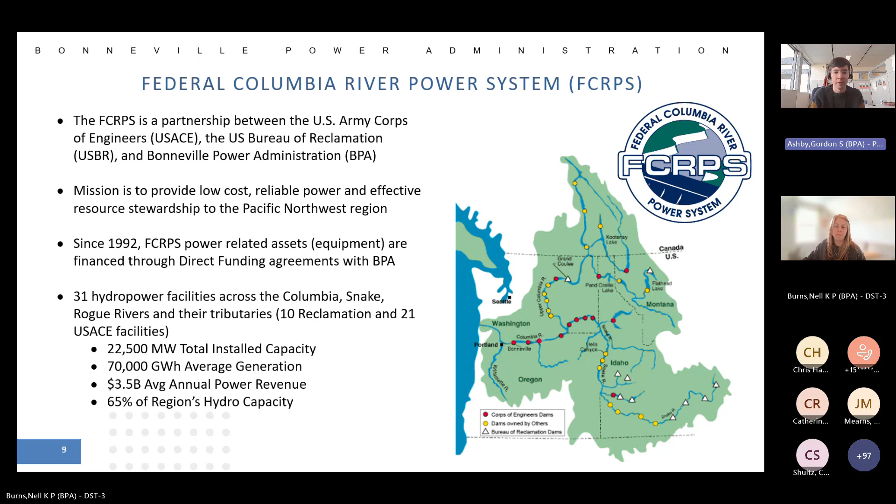Let's talk about some of the projects we funded through TI. This is one we've been working on for quite a while. We've done a couple of projects through TI on the Shuffled Complex Evolutionary Turbine Optimization Model, or SCE-TOM. Basically, this is something we've partnered with the Army Corps of Engineers to develop through the Hydroelectric Design Center, specifically the Hydropower Analysis Center, HAC.

What that model is doing is basically saying, given a head and flow and a number of units available and specific turbine designs, how much can you generate in a given hour? Essentially, it's an hourly model. It deploys the units in the most efficient way it can, and there's a lot of benefits to that.

It's become a very critical part of our capital investment analyses. We use it to evaluate different turbine designs, to see if Kaplan versus fixed blades make more sense economically and technically. We also use it to understand the impacts of unit outages. I'll talk about that a little bit more.

This specific project we're working on right now is to actually improve the computational power, I guess. Because what it's doing is looking at a bunch of different combinations of how you could deploy units under certain conditions. It can take a long time if there's multiple unit families and a lot of units at a plant.

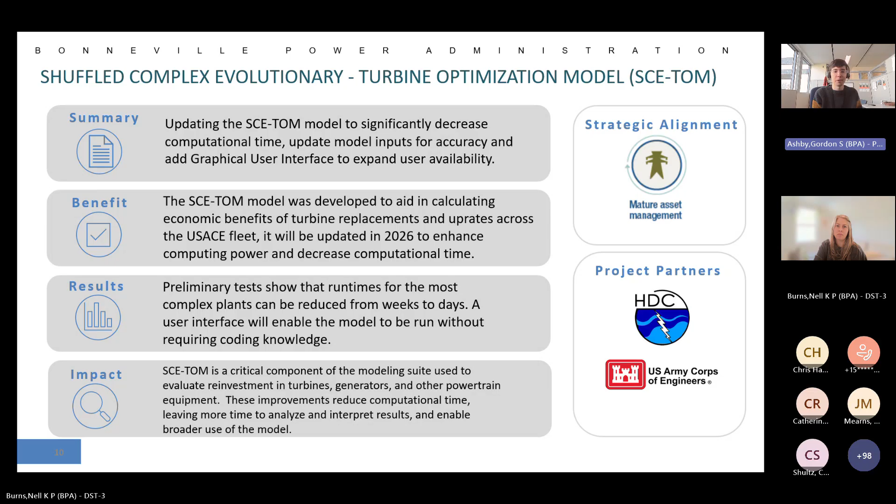Let's go to the next slide, and I'll talk through a bit more about how this works, in case you're interested. Basically, it's all based on these power hills. As I mentioned, it's looking at combinations of flow and head. You can see flow on the y-axis and head on the x-axis.

Each one of those bands is an amount of generation. At the very top line, it's a little hard to see, but that's 400 megawatts, for example. You can hit that across a number of different points in the head range, but the amount of flow obviously differs based on the head.

So this is basically creating a giant lookup table that says, given a flow and head combination, what is the most efficient way to deploy the units? In the background, given which units are available, it's able to track which way it would be deployed. Let's go to the next slide to see how we use that.

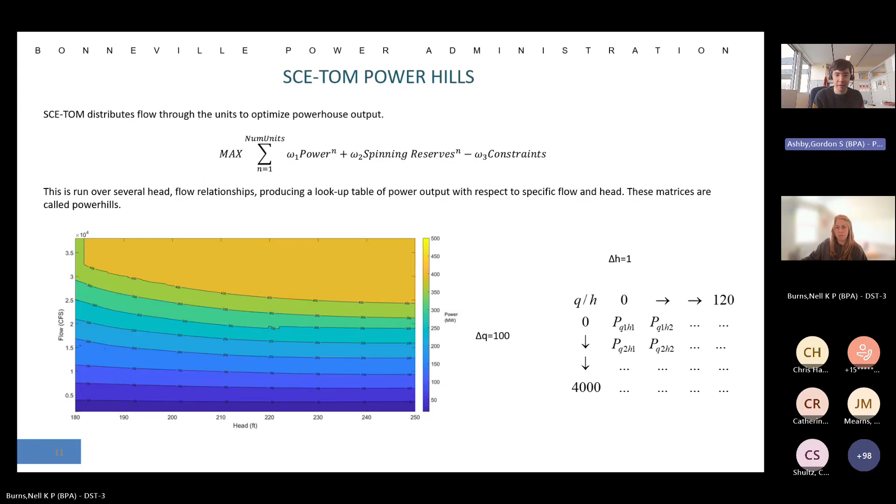We can look at the impacts of having units out of service, for example. On the top chart, if you have all units available, at the very top right the maximum you could possibly achieve would be 2,900 megawatts. But if you look at what it would look like with 3 units out, that 2,900 megawatts just isn't even on that hill chart anymore.

So maybe looking at the next line, where I've marked 2,500 megawatts, you can see that you can meet that with all units available, all the way to about the middle of the head range there, between 90 and 110.

But with 3 units out, you won't be able to meet that as frequently, and you have to have relatively high head and high flow in order to meet that. It kind of goes vertical, pretty close to the right side of that chart. So what's useful with this is we can get a really good picture under different circumstances of how much a plant can generate, and that enables us to get a really good look at the risk of losing units due to forced outage. So this is something we are really motivated to improve our ability to capture.

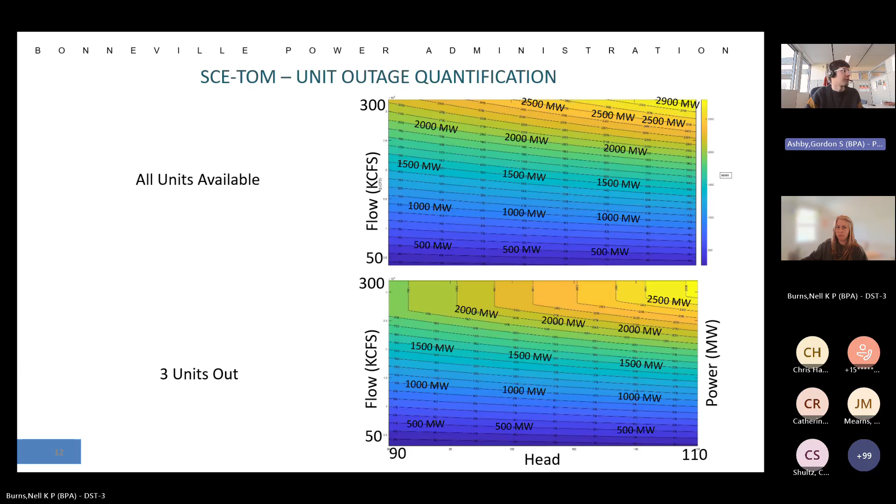Let's go to the next slide, and we can show how the SCE-TOM kind of fits into our broader economic analysis process. On the BPA side, we run a reliability model that looks at and simulates unit availability.

We do it on an hourly time step for something like 50 years to look at the full life of a unit. That model is availability workbench, a commercial product. We just use that to look at the planned outages due to general maintenance or capital investments, and then it simulates outages with failure curves that are loaded into it, Weibull curves.

So from that, what we get is 1,000 iterations of unit availabilities by hour, essentially, and that is what SCE-TOM and another related model use to tell us here's what you can generate under different investment strategies. We run different investment strategies through the reliability model that tells us which units are going to be available. Then, given that unit availability paired with the head and flow information and other hydrology, SCE-TOM can tell us here's how those units would be deployed.

And then the additional model, called the energy linking model, tells us here's the actual amount of energy you'd be able to generate under these scenarios. It also lets us understand reserve potential as well as different unit starts and stops. So we're able to really evaluate under different combinations of turbine design, if we want to look at a combination of fixed and adjustable units, for example, what those impacts might be.

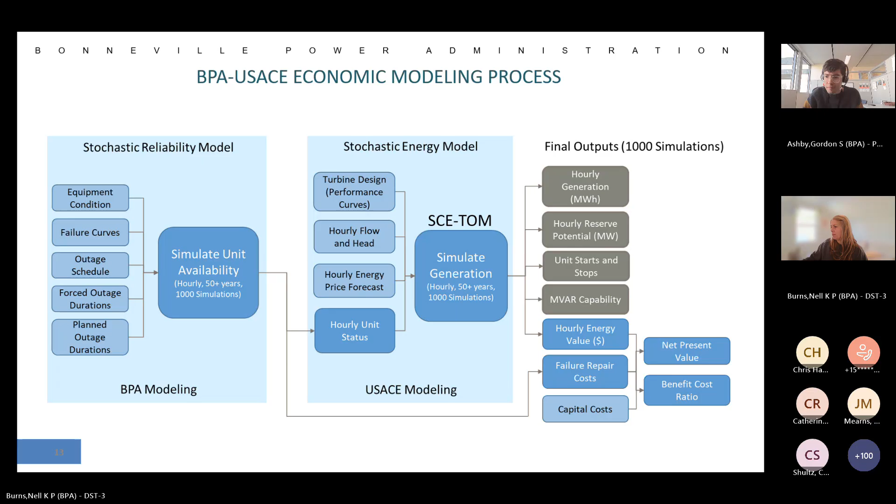Let's go to the next slide. Lastly, what this all kind of comes down to is we can take the availability forecasts from different investment alternatives, as you can see on the left side there, and then turn it into a stochastic analysis.

So we can present to executives, customers, et cetera, the range of uncertainty that is inherent to investment in hydropower, just because of the variance in energy price forecasts, water, and all this kind of stuff. It's helpful to be able to show that range of uncertainty because just using point estimates, sometimes it's hard to understand if you're right on the line between a positive or negative investment, or if you have a wide range of uncertainty, or are fairly certain in the benefits.

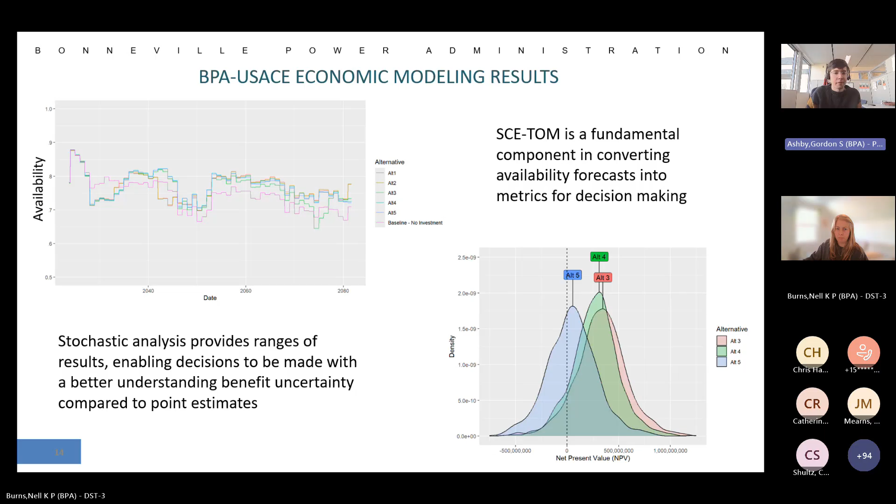All right, let's go to the next project. So the next one we've been working with the Army Corps on is a reliability-centered maintenance pilot. This has been kind of a partnership with the Army Corps and Aladon, who has been facilitating a lot of the pilot activities. The main purpose is just to start to understand how the Corps can implement more RCM procedures in their maintenance program. What they want to do is identify, for specific asset types, what's the right level of maintenance to meet the reliability needs at that plant for that asset type.

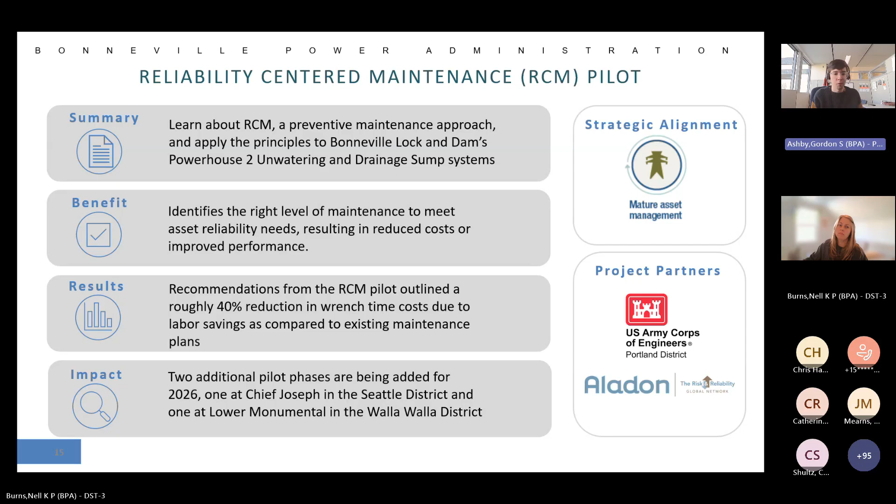So there have been some interesting recommendations that have come out of that. There've been a couple pilots that have been completed, and there's a couple more planned in the future. Let's go to the next slide, and I'll show a little more information about the types of things that have been learned.

So just generally, what is RCM? Here's kind of the 8 questions of RCM3, but the main thing is you want to look at the specific assets you have, look at their requirements, and then determine what are the right things to do to maintain this particular asset in order to meet its requirements and its mission. So what must be done to reduce intolerable risk to a tolerable level, and what can be done to reduce the tolerable risk in a cost-effective way. These are the kinds of questions that the teams are going through.

They're evaluating the failure modes and effects, evaluating the consequences of those effects, and then looking at their job plans and deciding whether there are things that are redundant in these job plans that are primarily time-based maintenance in the past, or are there things that are lacking. We've actually seen a few different examples. So let's go to the next slide.

So the first thing that was looked at was the unwatering and drainage sump system. That was one where they had identified there were some redundant maintenance tasks performed by multiple crews, so they were actually able to reduce wrench time on that equipment at that plant. They were able to see that effectively things were being over-maintained for what they actually needed. So that's an example where you've reduced some time, maybe saved some cost, or just freed up time to work on something more critical.

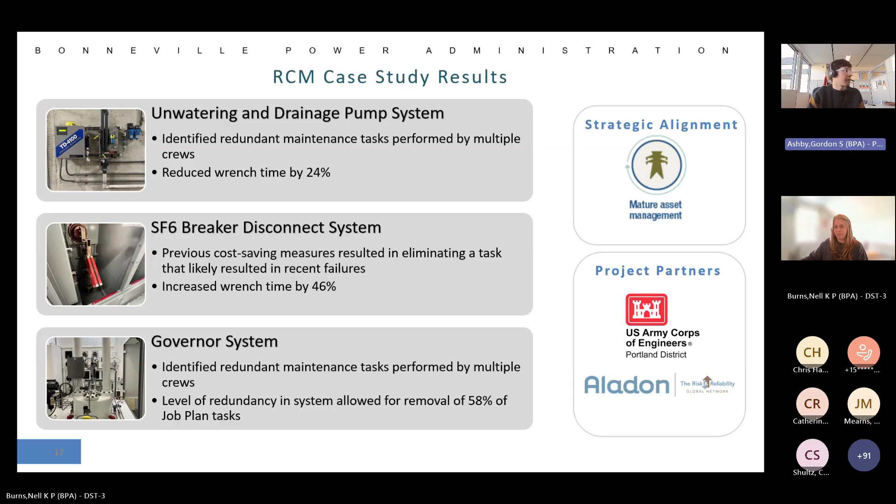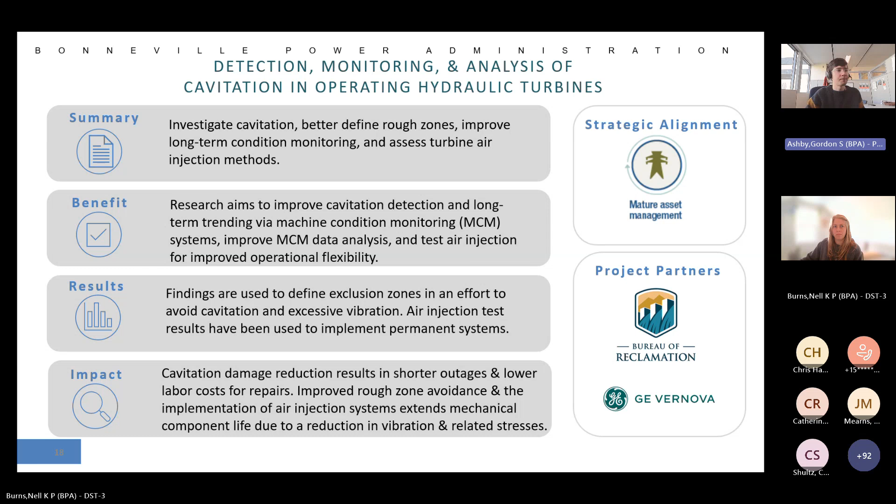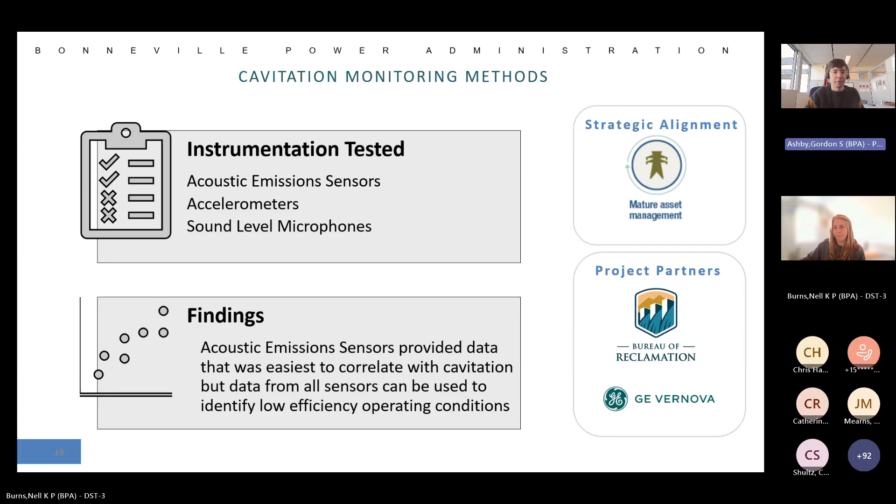So that was all of those that we were going to chat about today. We can definitely start to take questions if you have any for either of us.

Super, well thank you so much, Nell and Gordon. That was a great overview. I'm sure it's going to generate a lot of great discussion and Q&A here. So just taking it from the top, Jeff Leahy dropped in two questions. Nell or Gordon, I think you addressed the second one. We'll revisit it, but back up to the top. And Jeff, feel free to jump in here, but I'll just read your question out.

This relates to, I guess, managing through October and the shutdown, and I'm not sure how big of an impact that had on Bonneville, but Jeff writes: was a group SME meeting held this past October during the shutdown? If not, will it be rescheduled?

Yeah, we are on a different cadence than normal because of the shutdown and the administration change. So my presentation was based kind of on what we were doing, what we traditionally do year over year. But we had those meetings at the beginning of last fiscal year 25, and then we continued to use those inputs, and got some additional executive inputs for fiscal year 26. And for fiscal year 26, we just have a standalone one-year research priorities, which is also atypical. Typically they align with the rate period.